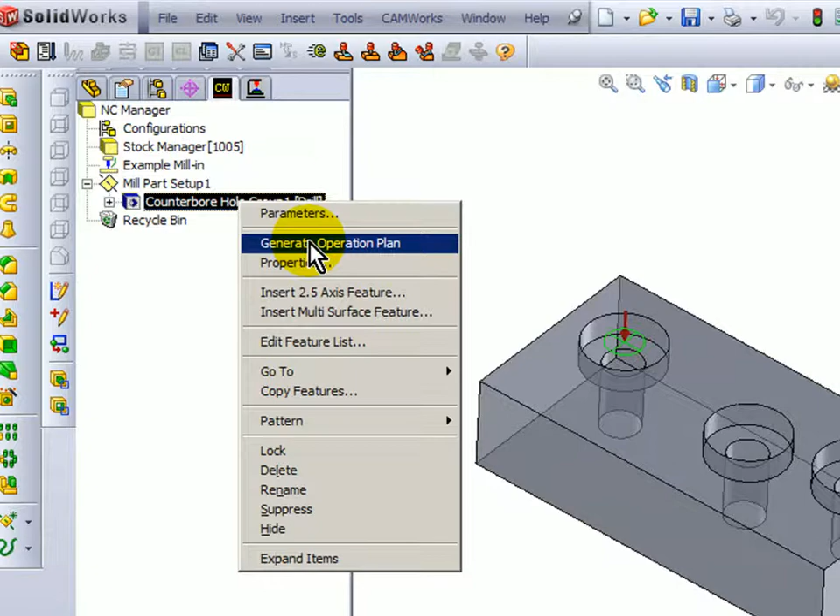There may be times where we want to machine counterbores from the top and the bottom. So how we do this is we will come to the CamWorks features tree, right-click, and extract machinable features. Here we see that CamWorks has given us a mill part setup and a counterbore hole group. We can generate an operation plan and generate toolpath.

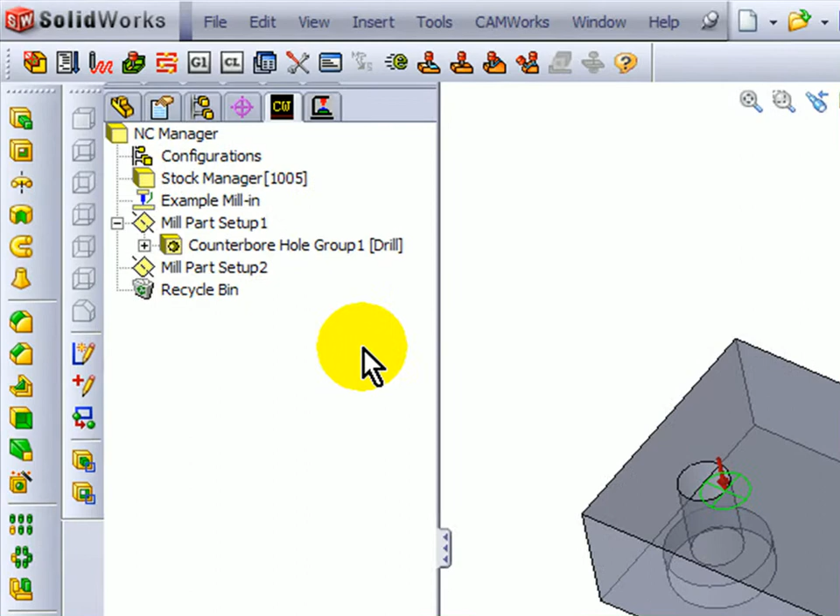At this time, we want to actually do the drilling from the bottom instead of the top. So how we do this is go back to the CamWorks features tree. We're going to insert another mill part setup on the bottom side. Click OK. Now we have mill part setup 1 and mill part setup 2.

What we do is right-click on the counterbore hole group, or the feature that you want to machine from the bottom side, and you select Copy Features. We want to copy this feature to mill part setup 2. We can also copy the operations.

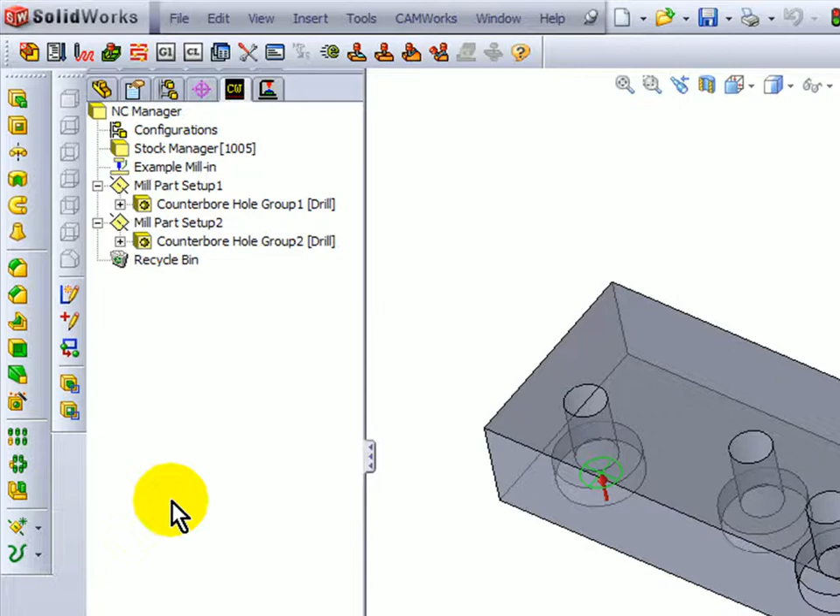Click OK, and now we go back to the operations tree and we see we have the same machining operations for the top side as well as the bottom. For the top side, we just get rid of the 2 drilling operations, and then we can get rid of the contour mill toolpath on the bottom. Generate our toolpath.

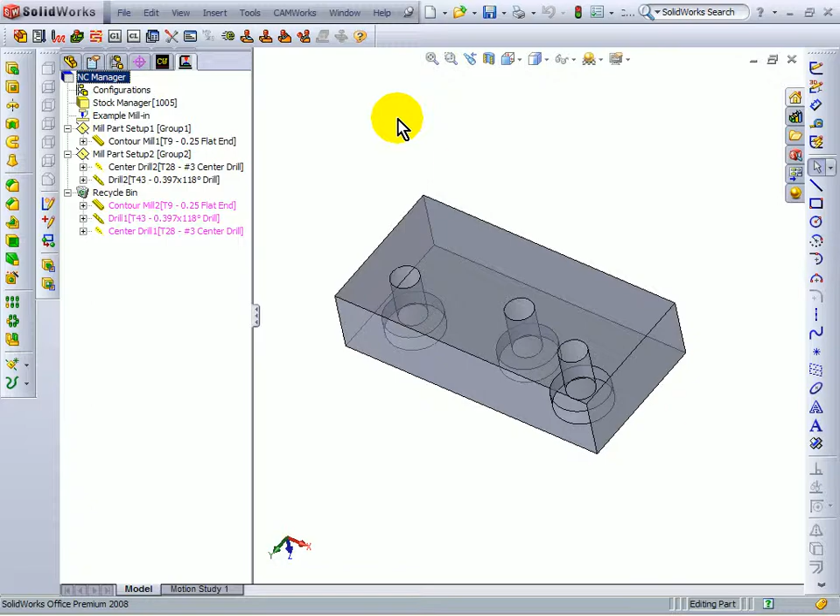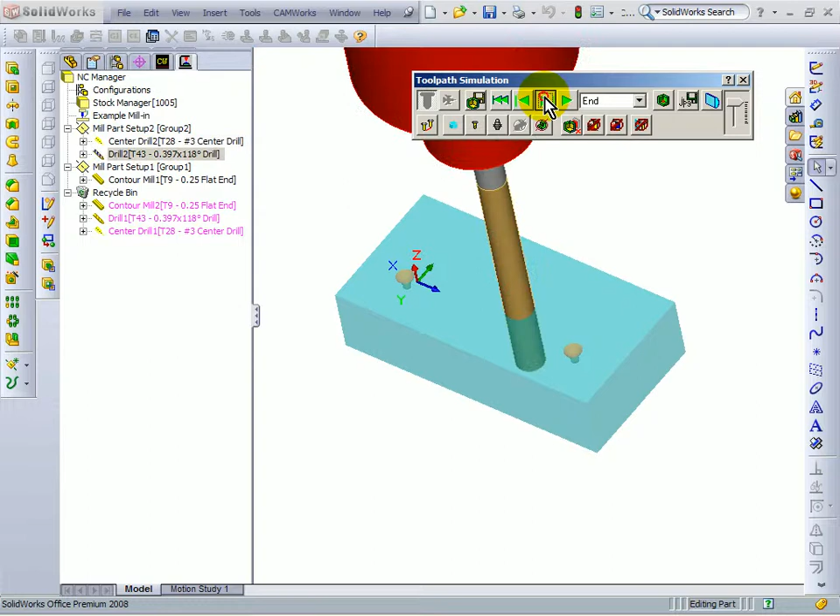The next thing we want to do is make sure that mill part setup 2 gets drilled before mill part setup 1. So we take mill part setup 1 and drag and drop it below. Now we're going to do the center drilling and then the counterbore machining. And we see our drilling, and then our counterbore machining.

Another way to do this would be to edit all counterbore features. And here we notice in this counterbore feature, if we look at the custom sizing, that we have a 397 diameter drill through hole.

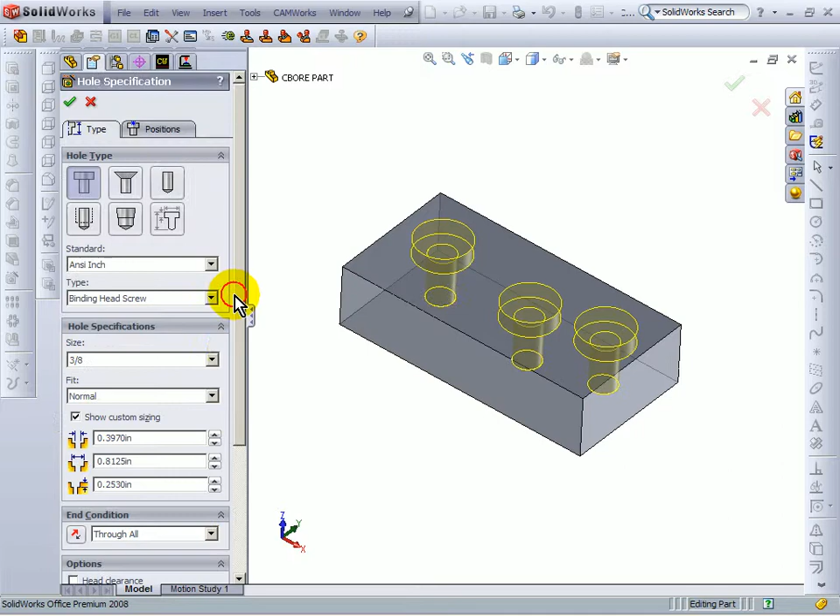If we come down here and select the far side countersink, we have a 397, so let's make this point 399. We'll click OK, and you'll notice we'll have a little countersink, a 1 or 2 thousandths countersink on the bottom.

Next, go to CamWorks, extract machinable features. Here we have the bottom setup and a top setup. Now on the bottom setup, we have a drill attribute. What this drill attribute will probably produce is a center drill, a drill operation, and a countersink operation.

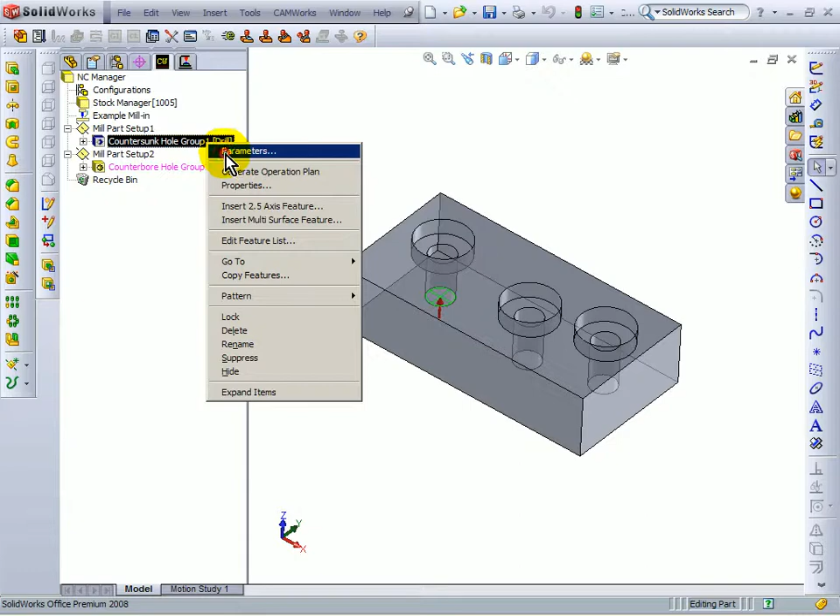What we want is only to do the drilling. So if we edit the parameters and select a drill only attribute, this drill only attribute was created in the TechDB by myself, and you can do this also. This is not a standard attribute that's included with the CAMWorks TechDB. So you would create a user-defined attribute telling it that you only want to produce a drill only operation.

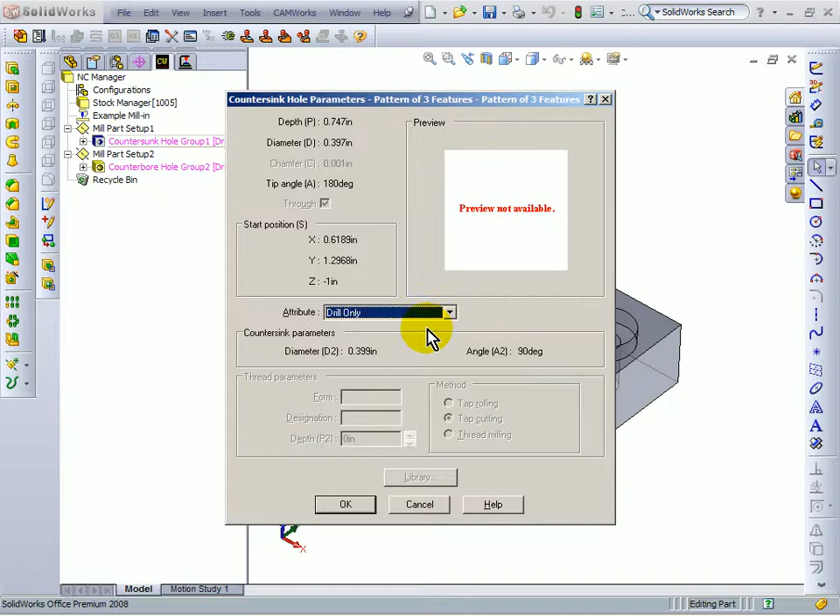Again, with the top, since this is going to be drilled through from the bottom, we want to go to a user-defined attribute which was created manually in the TechDB. We click OK, and now we can generate our operation plans.

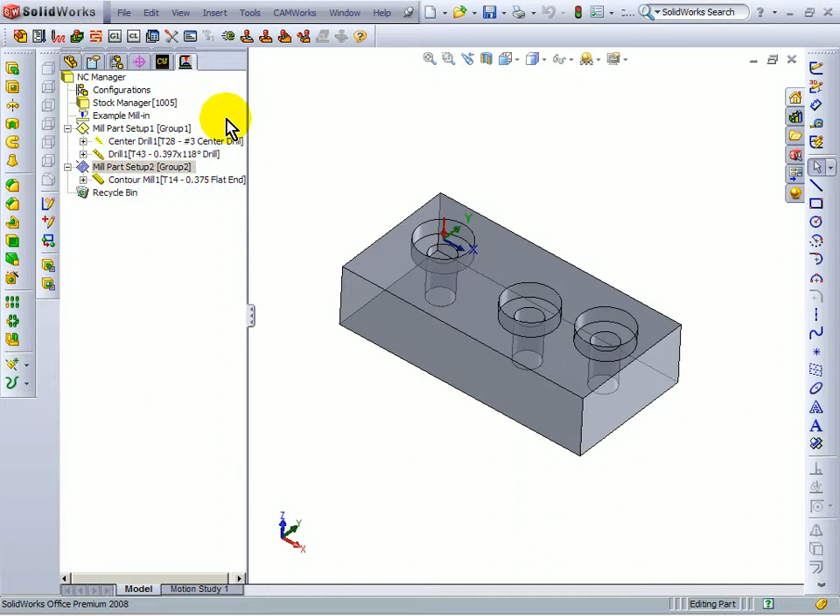And here we see from the bottom we are center drilling, and from the top we are only doing the contour milling. So we produce the toolpath, do a simulation. Here's your center drill, here's your drilling, and then here's your counterboring, or however you want to machine that.

Now notice that the bottom did not drill through completely, so all you would have to do is adjust the drill depth in this operation to get it to drill through completely.